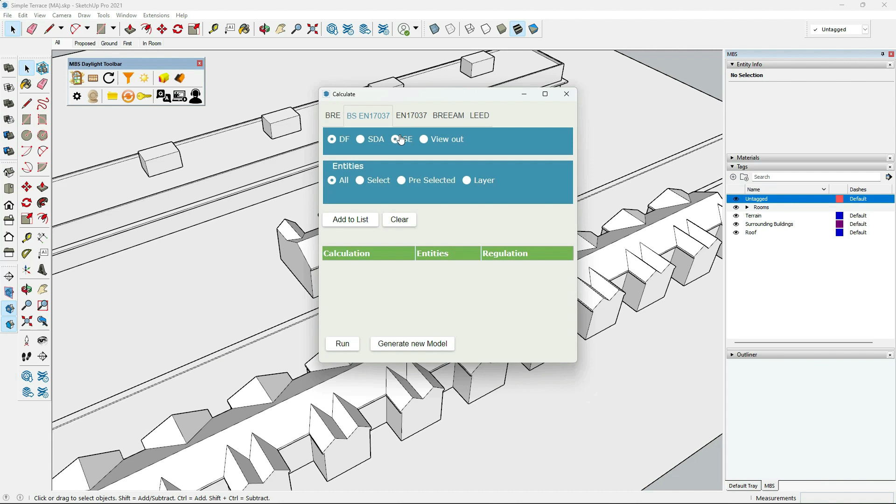So let's have a look at the model to start with. We're going to analyse this new terrace property that's going to slot in here.

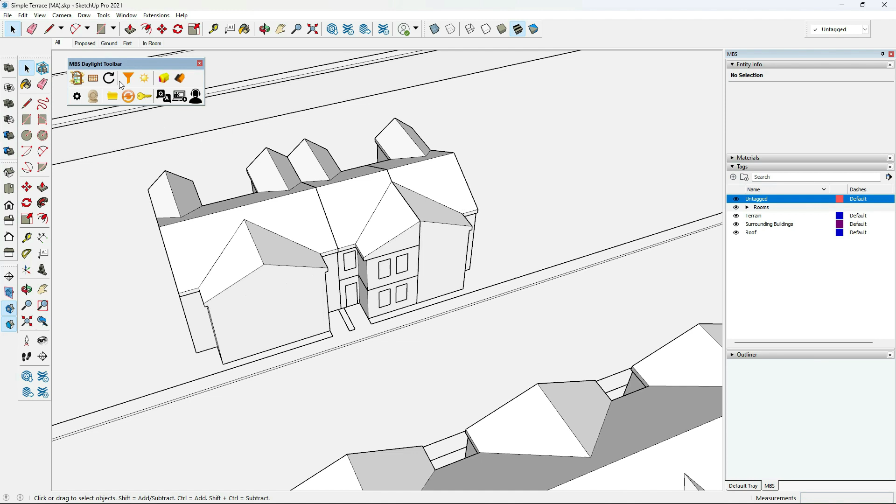I've set up a couple of scenes at the top here just to aid changing layers or tags as we move through. So let's have a quick look at those. So we've got proposed on its own.

I've also got the ground floor. I've run a section through, and you can actually see I've already set up some materials on the ground floor. I'm going to take you through exactly that same process on the first floor. And we've got the final tab, which just takes a view from inside the room.

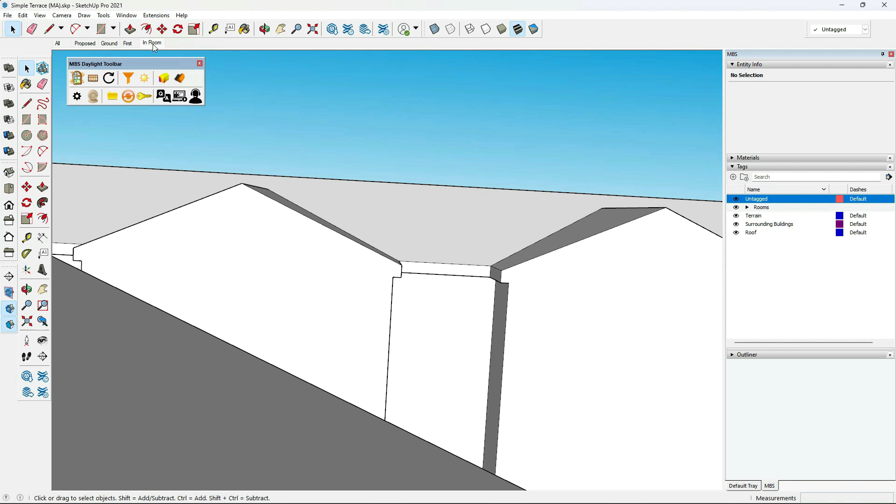So let's go back to that first floor and let's look at some of these materials. So when you install Daylight, you get some basic materials that we've included. Obviously you can add your own as well, but they just aid in seeing what's been applied to what surface.

So we've got the ground and external walls. We're going to apply those in a little bit, and then we've got the internal layers, so ceiling, floor, internal walls, and the reveals of the window. So let's apply some of those.

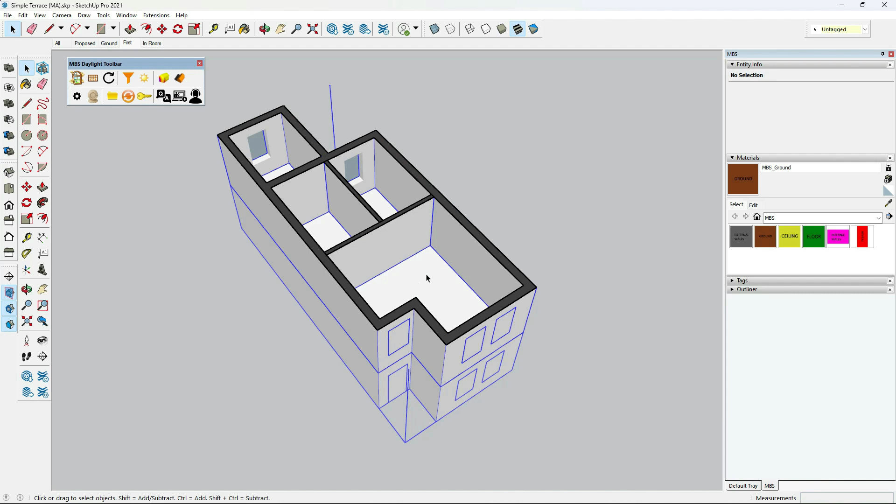So I'm just clicking inside the group, and we can use the floor first. I've just applied floor to this plate that runs underneath all of these, and it's been created as a group, so I can apply material to the group as opposed to a face. Just saves a little bit of time.

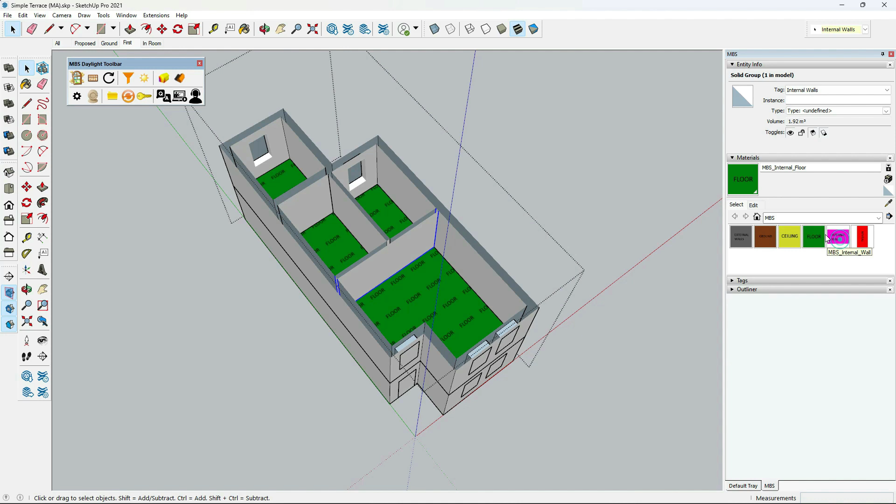We should be able to do the same thing with these internal walls. I need to do the same thing on the internal walls here, but this time, because they're also external walls, I just need to click inside that group and just apply it to these internal walls.

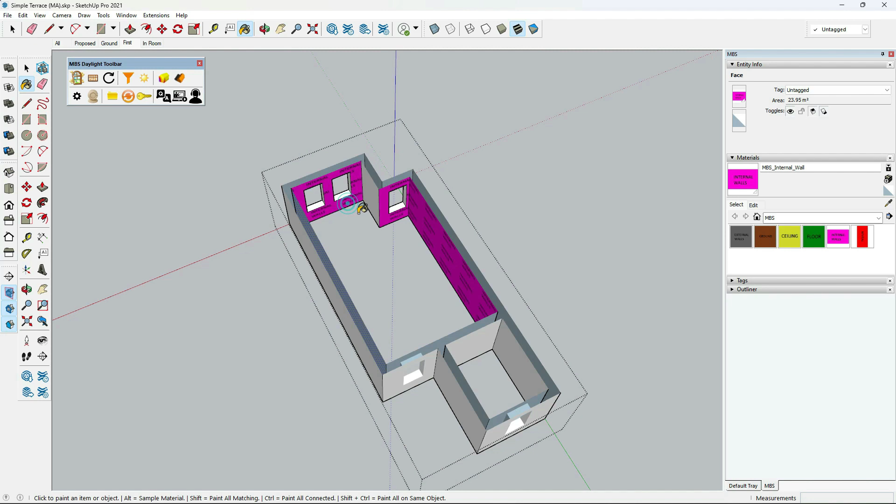Now we can do the same thing for the small room as well. And then we're also going to apply the reveals while we're in here.

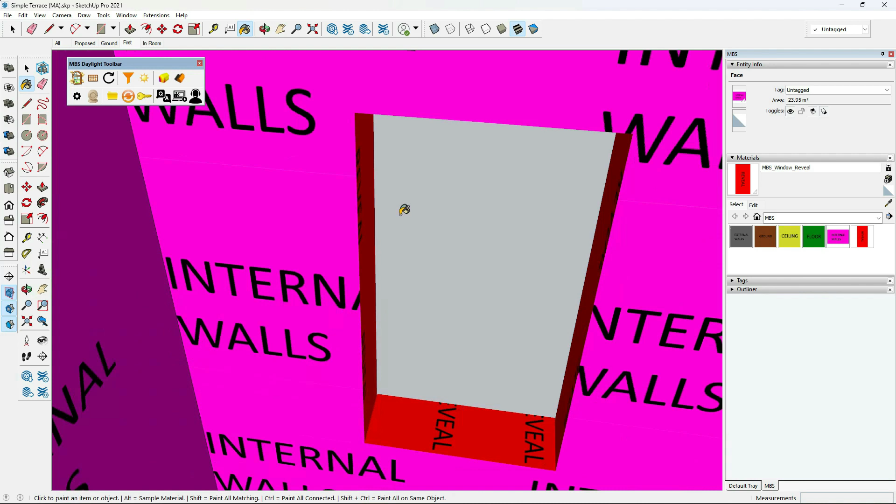Okay, there you go. That was a bit fiddly on that last one, but I think we're pretty much there. Okay, and then these front ones as well.

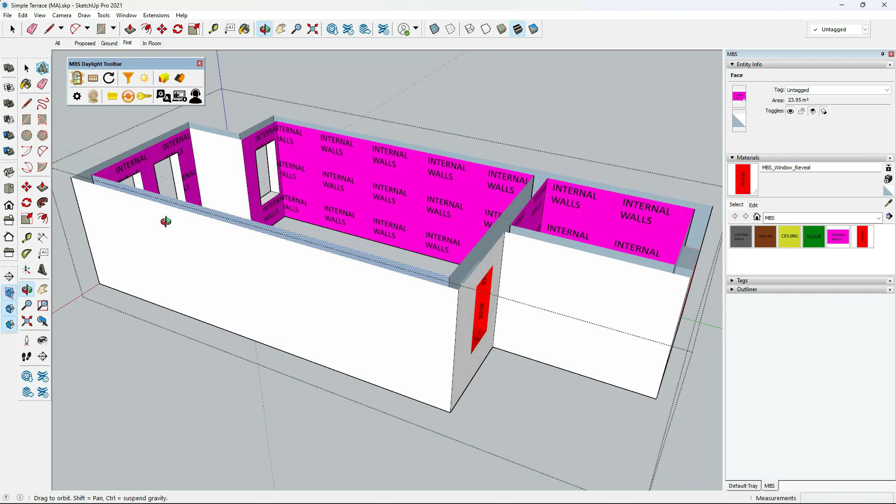And this window around the side as well. Okay, and that's it. I think I've applied that to all surfaces.

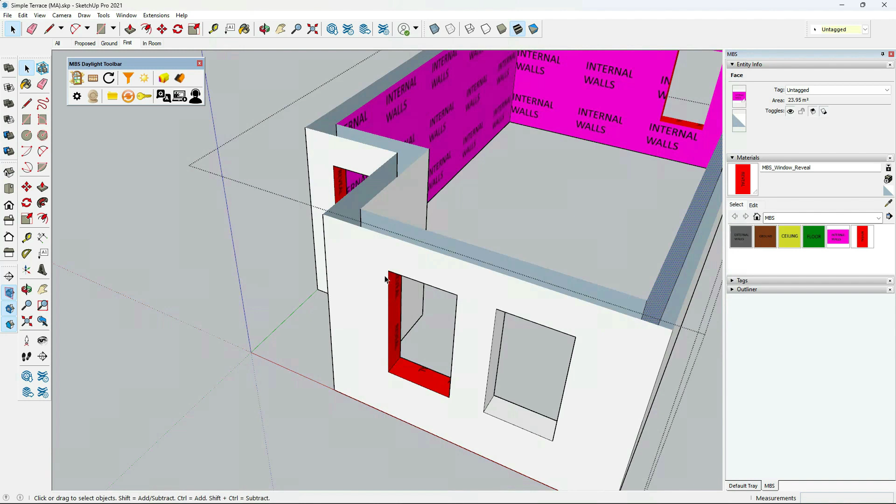So let's just escape out of that, so I can exit that group. So I've got the floor, the internal walls, the reveals done. So all that's left is the ceiling.

So because this section cuts below the ceiling, I just need to exit out of here and go into the proposed. And then we can look at just hiding the layers so I can get at the ceilings.

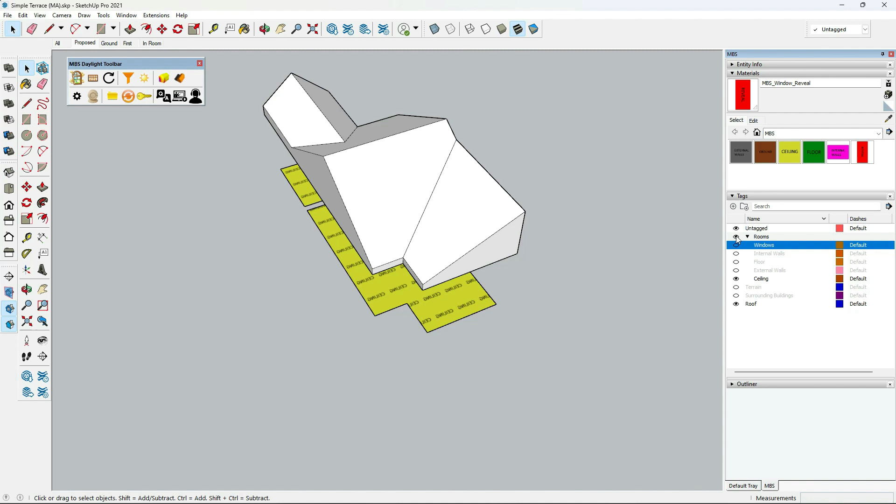So yeah, so you can see the ceiling's already been done on the ground floor, so I just need to apply it for the first floor.

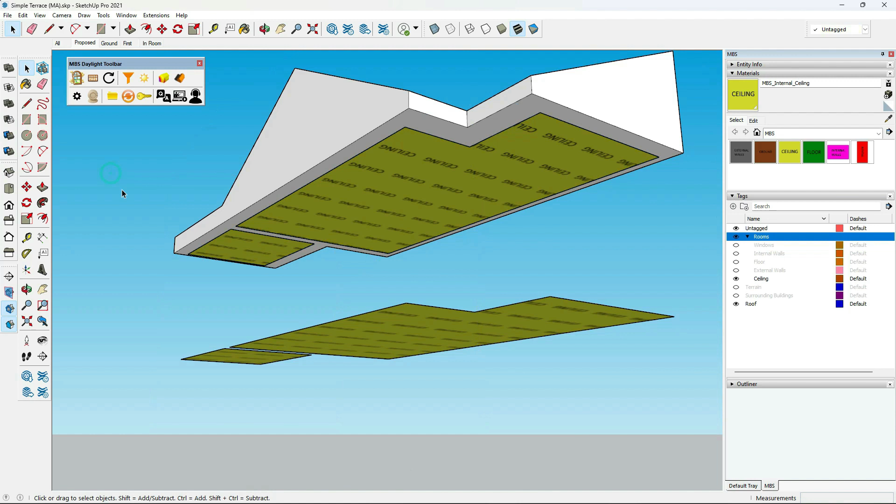Okay, and again you can see I've put them into a group, make it a little bit easier to apply materials to it. And that is that. Yeah, so I've now done the ceiling, I've done the internal walls, I've done the reveals, and I've done the floor.

So all we need to do now is the external finishes. So I'm going to do that from the proposed here. So we're going to apply external walls. And I can do it to the roof first.

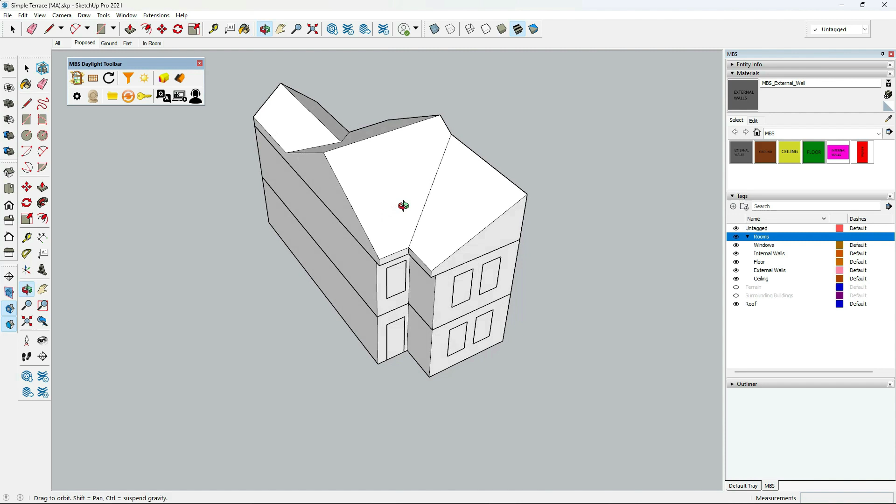Actually, I've done the whole thing there. Let me just undo that, because that will do the outside walls as well. So let's get inside the group. Right, now I'm dealing with just these entities.

Okay, and again here I can now get to the individual faces and apply those materials. If I'd selected the whole group, it would have applied it to everything in that group and overwritten the internal stuff that we'd already done.

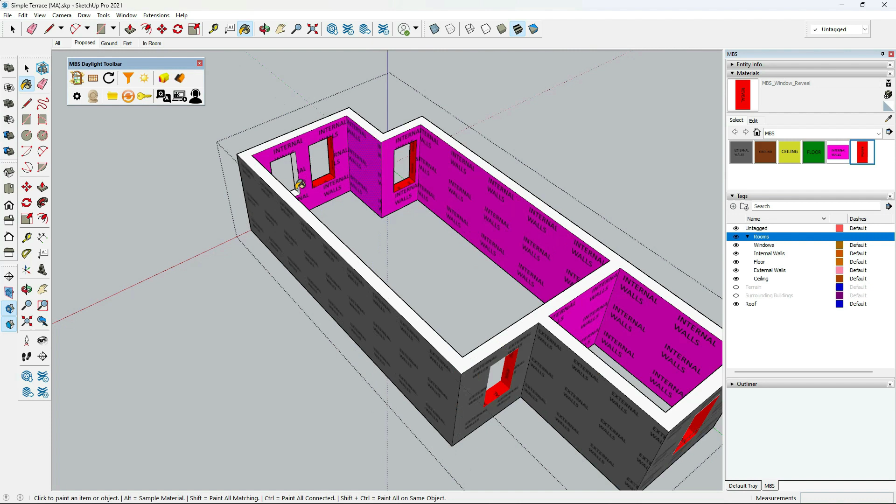Okay, so that's those done. You can actually see I've missed a couple of internal walls. Let's just go through and do those again. Okay, and I think I've missed a couple of frames as well. Okay, there we go.

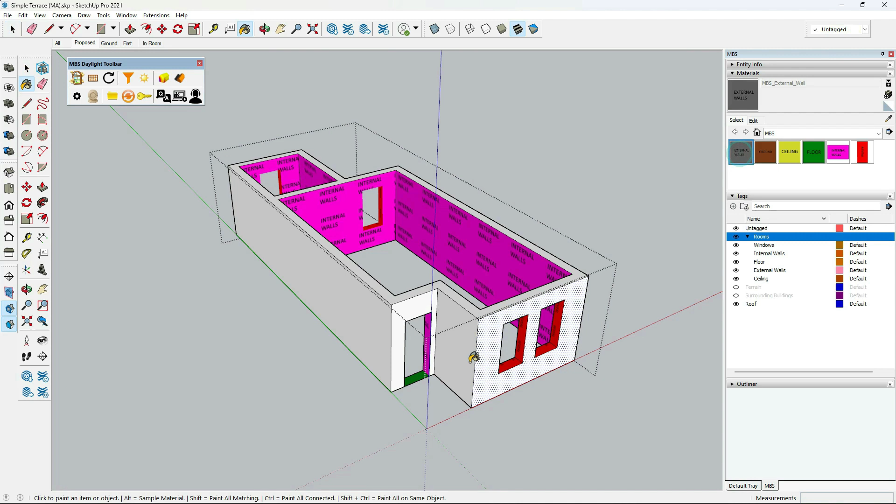So I think we are there. Yep, you can see I just need to do the same thing on the ground floor. If we go back to the scene, we should be able to see everything done now.

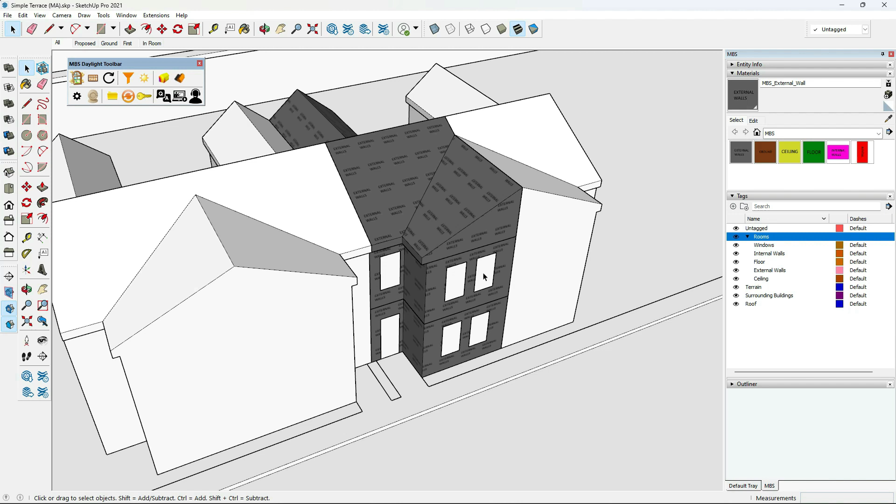And there we go. Okay, so the materials are applied. We're just ready to go ahead and register the windows, and then register the rooms, and then we're pretty much ready to go with our analysis.

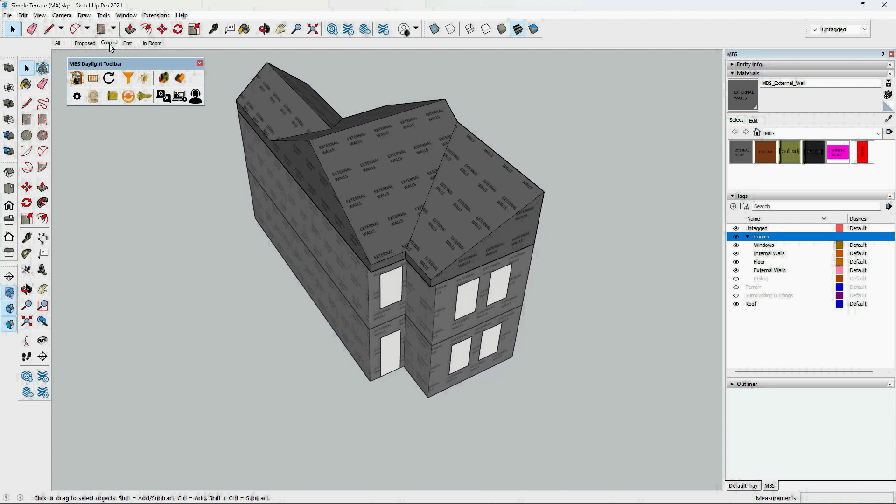So let's just stick to the ground floor here. So let's do that. A little bit easier to see if I just click on the ground scene, and we can open the register dialog box. Move that over there.

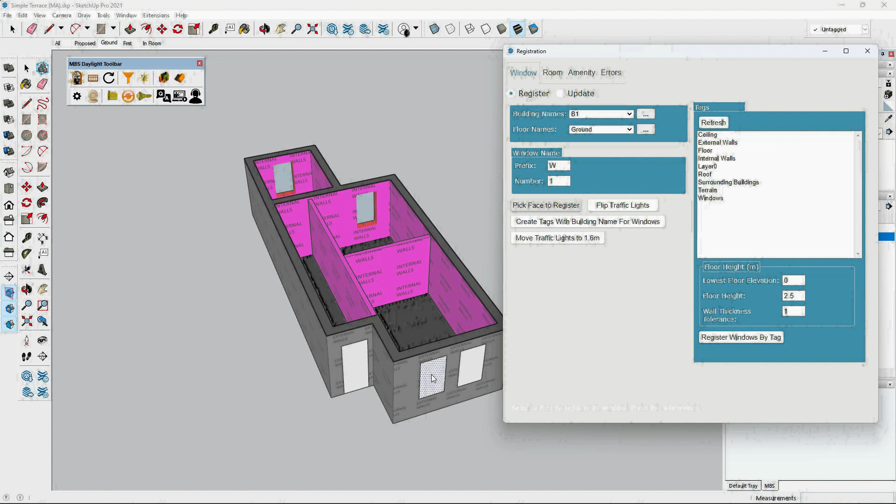And I'm just going to register them in a sort of clockwise position. So I'm just going to go with the default building name. It's the ground floor, window 1, and pick face to register. And then I'm literally just going to apply these 4 windows.

And it's as simple as that. That's the windows registered. And then we're going to do the same thing, but registering the rooms.

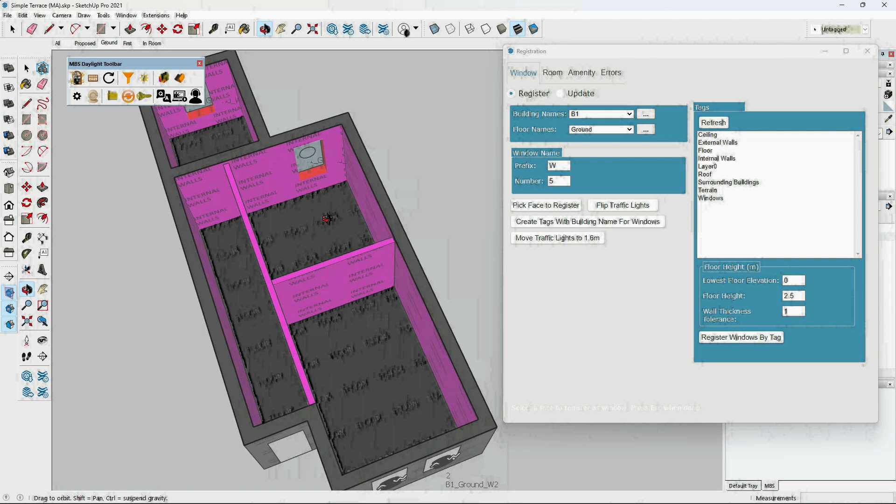So, okay. So this time I need to get at the floors. So change that to room. And we're going to call it, I think we're going to call that front one the kitchen.

Okay, and we're going to create the middle one as the living room, and the back room we'll make the lounge. And that is that.

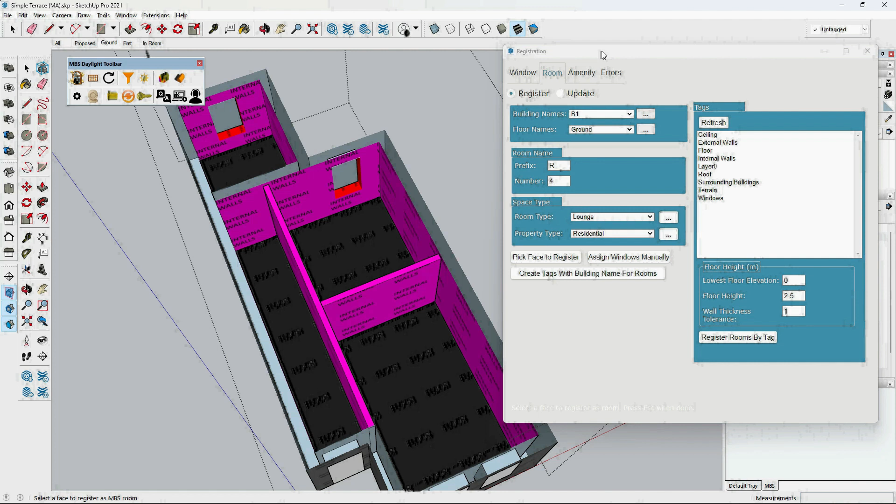Okay, so let's just close that down now and go back to the external with everything turned on and convert the model.

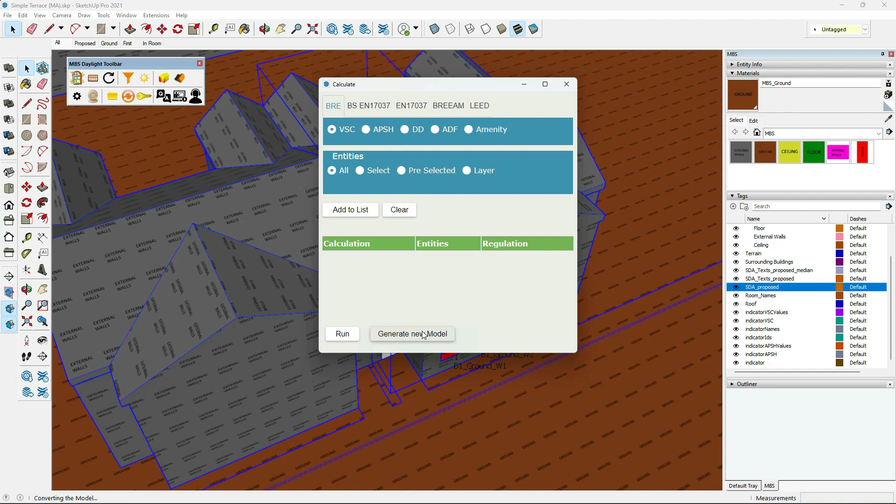So once the model's converted, which shouldn't take very long, a few seconds, it will give us a list of materials. If I go to the materials dialog box, you can see the materials that we've used within the model, and it's got the materials that are currently applied to them. Diffuse texture basically is a material that has got a bitmap associated.

Hence I've got the words with the various materials to aid selection. We're going to replace those anyway, overriding them with our own materials from the boxes over here. There's various lists you can pick from. We're just going to pick from within EN 17037. You can go through and create your own materials as well, but I'm not going to go through that in this video.

So let's run through these. External wall, I'm just going to give that 20. Just pick the one you want to override and then hit update selected material. I'm going to make the ground 20 as well, internal walls 50 - just going with the recommended values. I'm going to go for quite a high value for window reveals - they're usually the same as the ceiling in my experience. And then the floor.

We've actually got another material that's appeared here. It's basically a face within our group that hasn't got one of the materials assigned to it. The chances are it's an internal face that you can't actually see. If that occurs, you can try and find it and give it a material. In this case, I'm literally just going to give it a low reflectance value, but that's not going to impinge on the analysis. So I can hit apply and close that down.

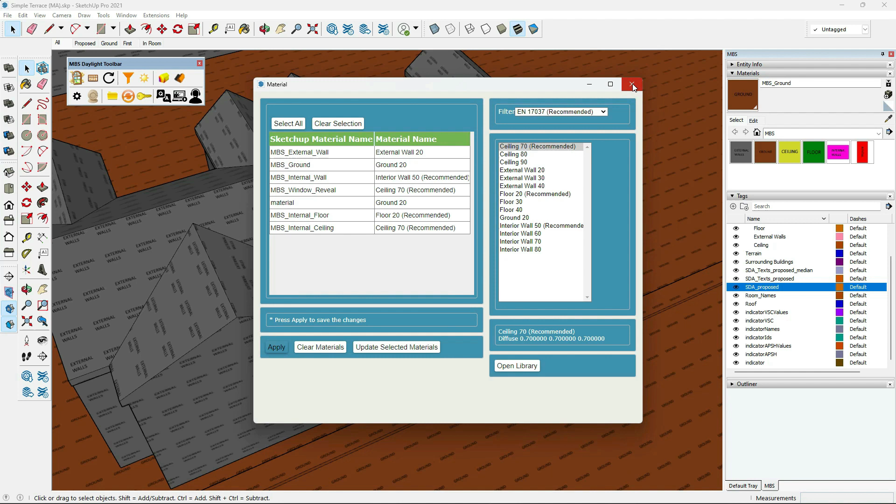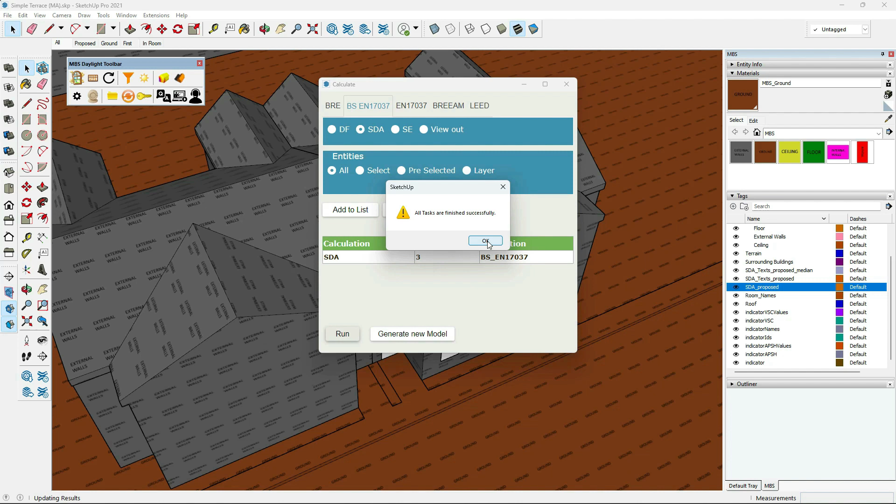And I'm now ready to run. So let's get the calculation dialog up. BS EN 17037, I'm going to run spatial daylight autonomy, and I want to run all the rooms that I've registered. Then we can click run. Okay, that's completed now - I paused the video while it was running, but it took around 30 seconds for those 3 rooms within this model. You can hit OK to that.

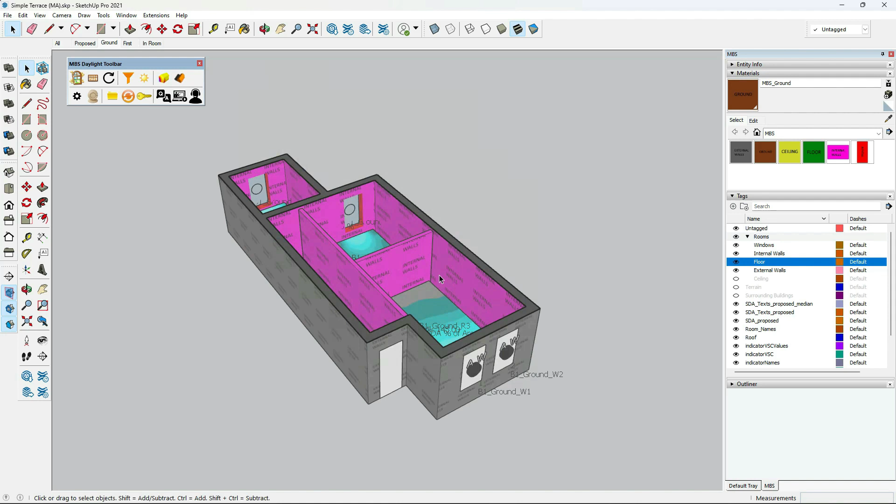We can close the calculate dialog down now and go and look at those results. Let's go to the ground floor. You can see we've got some contours that have appeared here and some values as well. Let's zoom into one of these and have a look in a bit more detail. Based on the target illuminance we're trying to achieve, you can see we've achieved that target illuminance for 41% of the room.

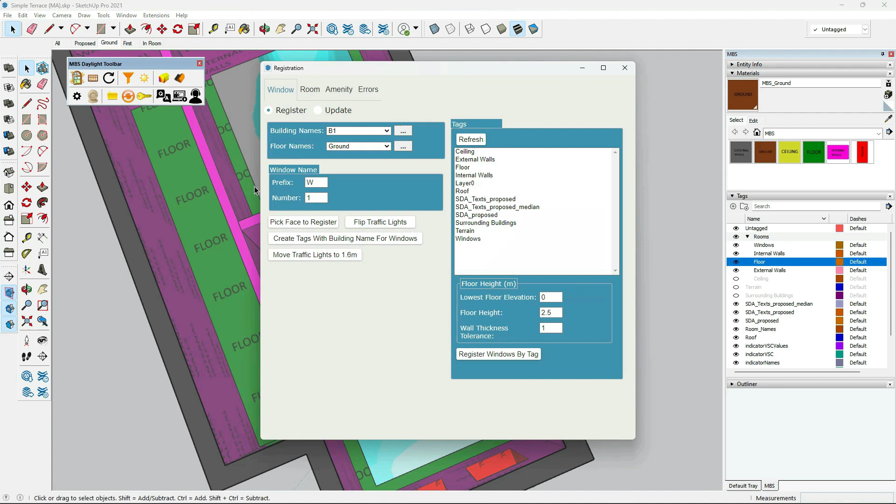The median illuminance for the room is 145. I'm pretty sure we set this up as a lounge, or was it a living room? That would be a target illuminance of 150. We can check that - let's update the room. Yeah, ground 3, so we have got that set as a lounge.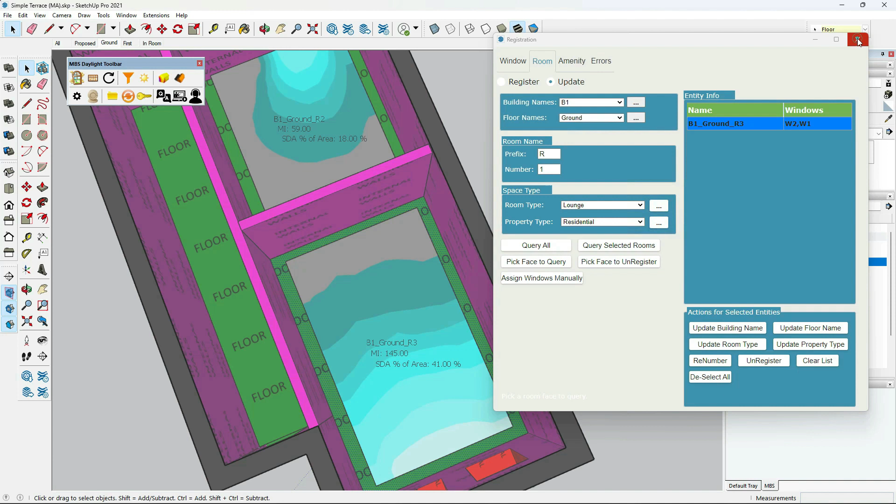So if we go back to settings, you can see under the criteria for EN 17037 what target lux we've got for the various types. Living room obviously set to 150, but if I've got a lounge, it isn't actually appearing on this list. If that's the case, it will go for this option here, occupied space. So actually it's got a target illuminance of 200.

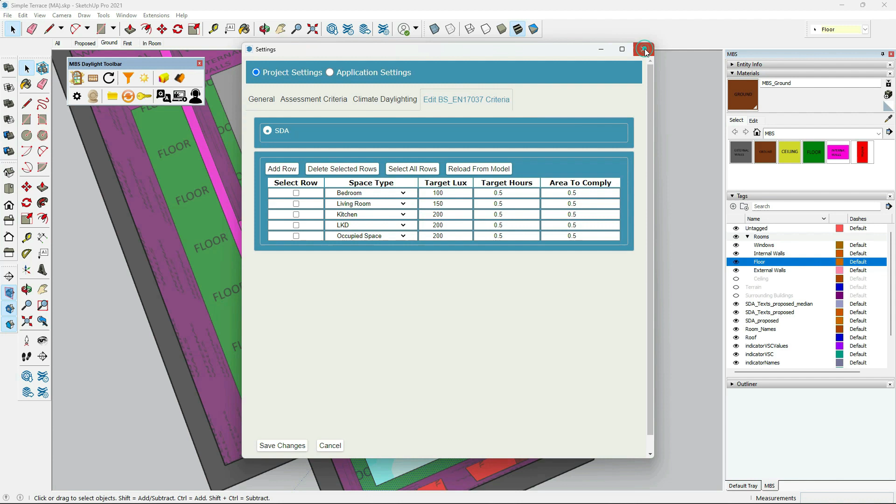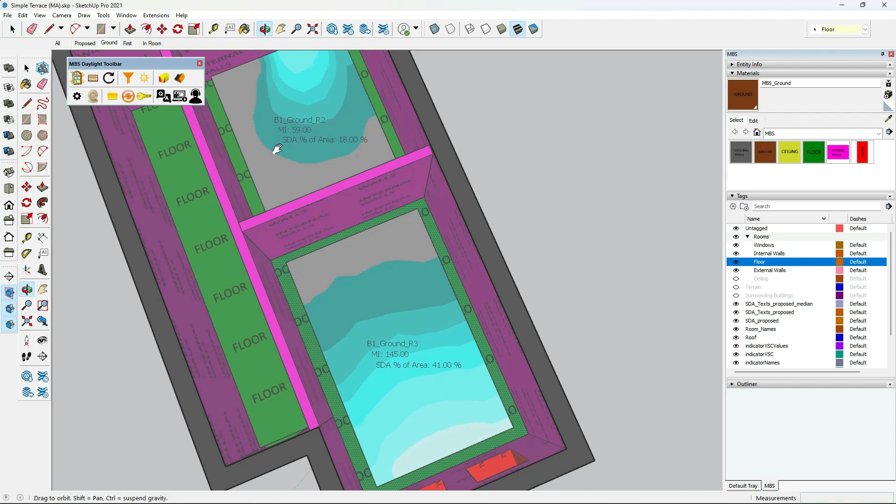So let's go back to that and have a look again. Yeah, so that's why it's not achieving the 50% mark we're looking for, because its median illuminance is below that 200 value. You can see in this one, again, we're not getting enough light effectively, so we're trying to get a value of 50%, and our median illuminance is 59. So even if that was a bedroom, that's not going to achieve our value.

In fact, it's not looking great for this analysis. We've got the same issue here - I've got a median illuminance of 115, but I've set this as a kitchen, so we're looking for a target value of 200, and we're only achieving 115. Hence the area that meets it is not achieving 50%. If that was 50%, I would expect this median illuminance to be very close to 200.

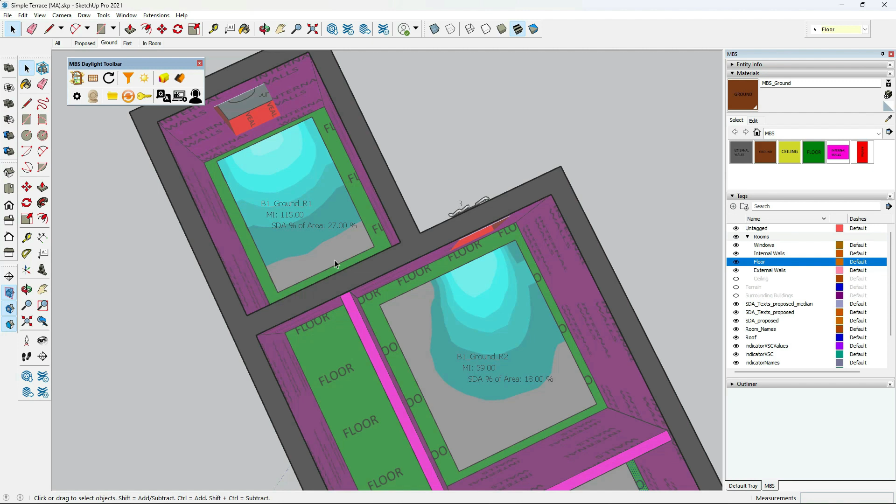The two would match. I'm just going to complete the video by showing you a few choices you have for the legend. Under settings, application settings and legend, if we set this to SDA, you can see the setting we're currently using, which is lux. It's showing it in bands of 50 lux at a time, up to 750.

Alternatively, you could use a percentage of hours. This is the target value, so we've got that set to 50. In other words, we're going to get a block colour rather than the bands, and the area that is coloured is showing you the passed area within the room. Obviously if that achieves 50%, that's going to be a pass.

You can alternatively also show hours - that would just show the hours being achieved within the room. But we tend to go with that other option; I think it's the most descriptive. And that concludes this video. Thanks for watching.